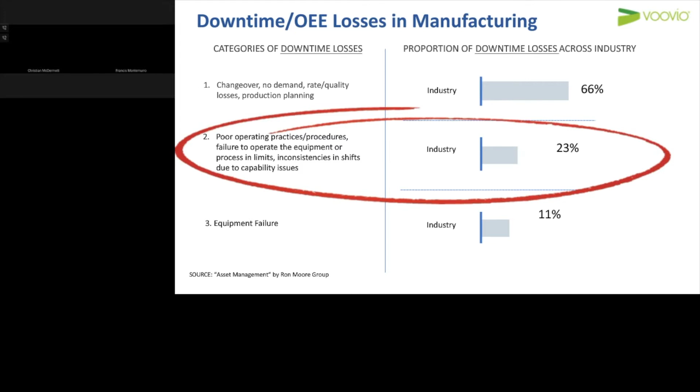Building on that a little more around operational discipline and building operator competency. If you think about what our operators are asked to do whenever they are new to a unit or a new hire within a manufacturing organization...

They are asked to train and qualify on hundreds of procedure pages just within a process unit. And what we've found in our projects is these procedures are written with generalizations and ambiguities that assume operator competency. Detailed on the page are some examples of those generalizations.

In addition to these ambiguities that exist in the procedures, the operator isn't afforded the opportunity to learn the entire procedure, mainly because the plant is in operation. So they're not afforded the opportunity to start up or shut down an entire process or complete an equipment swap.

So when they qualify after 2 to 3 months, they really only learn about 30 to 40% of the content that will be required for them to be fully productive and effective.

And because our seasoned operators are becoming scarce, as the baby boomers are retiring, and our non-essential personnel are being asked to work remotely or from home due to the pandemic...

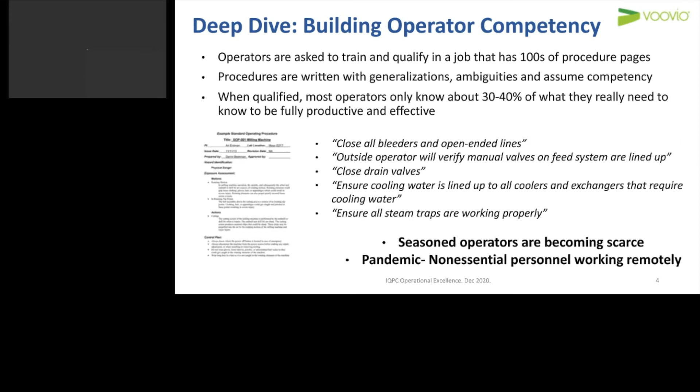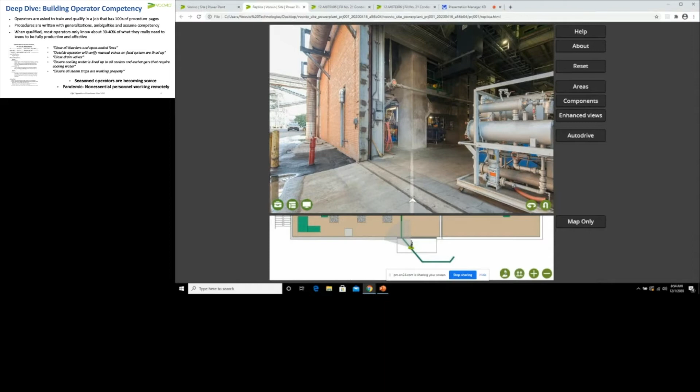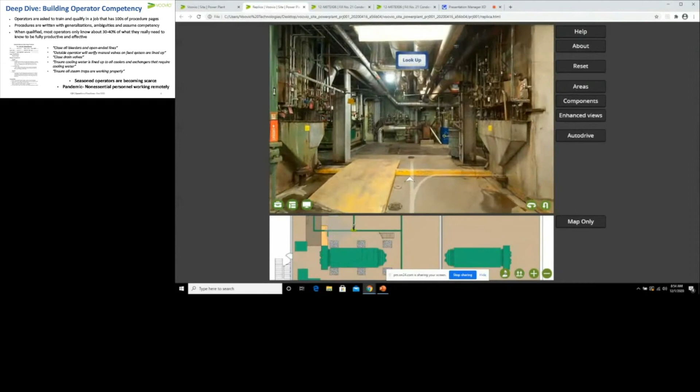So I am doing this from my laptop remotely. I'm not in the office, but I'm able to walk through a real plant. It's photorealistic, all the equipment, how it is in real life. And as you walk around you'll notice I can turn corners, look around, turn around. So you have the same degrees of freedom as you pretty much would in real life.

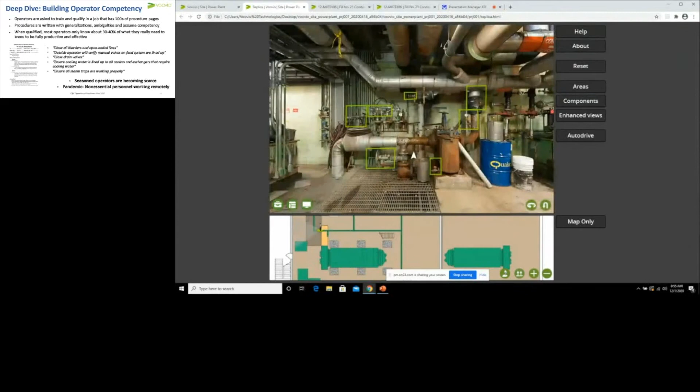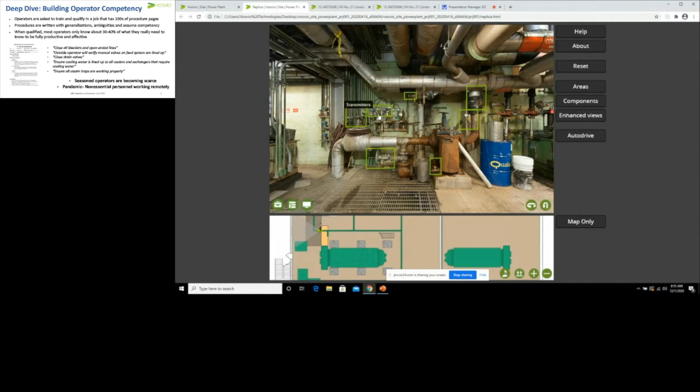You'll see as I turn around here, there are these green boxes, so you can also have equipment tagged and labeled. So operators anywhere, in the control room or even from home, can access and view their real equipment with the correct names.

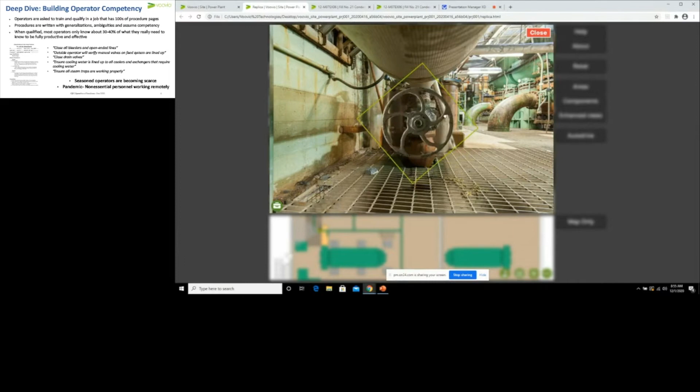And if you click on one of them, you get a detailed view of that piece of equipment. In this case it's a valve, and I can even grab the valve with my finger on my touch screen, or your mouse, and rotate it. So we can recreate the real functionality of equipment.

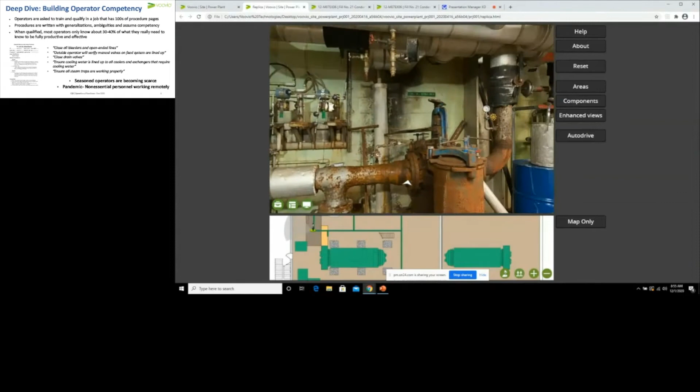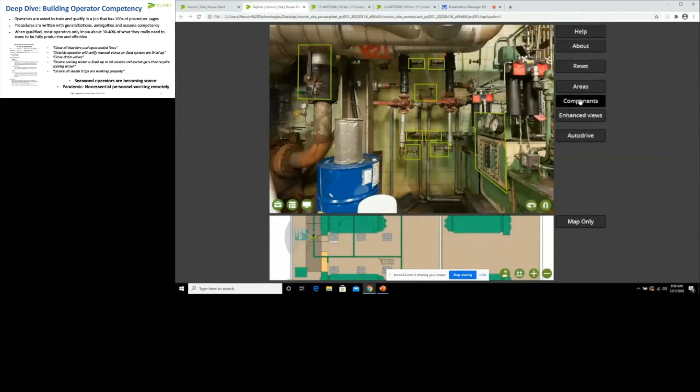The stuff you're seeing right now is, of course, small items and instruments, but we can tag vessels, pumps, compressors, things like that. And operators can find things without needing to rely on those experienced operators, simply by opening up a search box and typing in what they want to find.

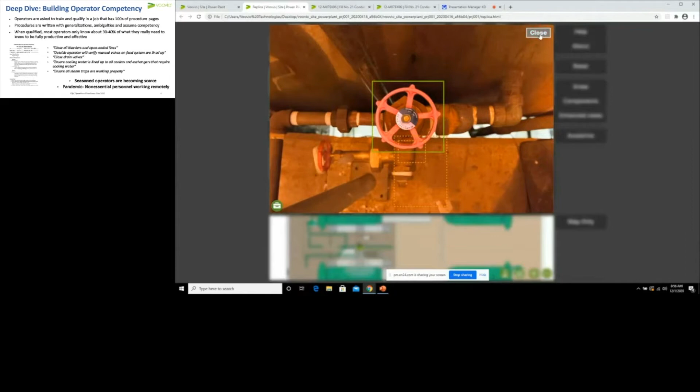For example, 993, it's a valve. You click on it, and it will take you straight to that location in the plant where that valve is. So you don't have to rely on people to find things.

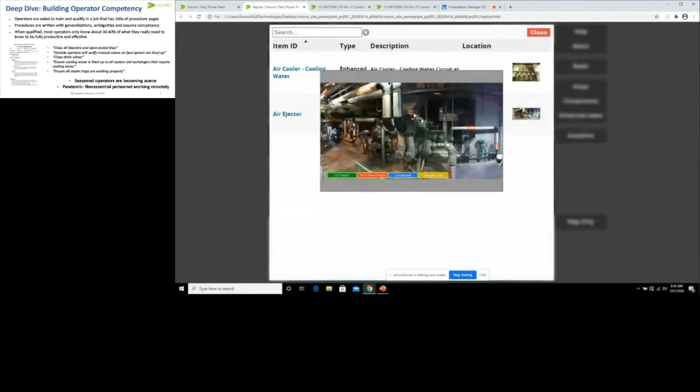Within digital replicas, you can also embed what we call enhanced views. This is where you have a piece of equipment like this air ejector and a bunch of labels at the bottom, and we can click on these icons and activate the flows. Here you can review or refresh your memory on how this piece of equipment works. It's a tool you can use for training remotely, or even just for refreshing before you go in the field, or even take it with you in the field on a device. And likewise, where you have complex manifolds...

We get requests from customers for these types of enhanced views all the time. Operators can interact with these valves and understand how this process works. So you'll see my mouse here on the right. I can click on it and open.

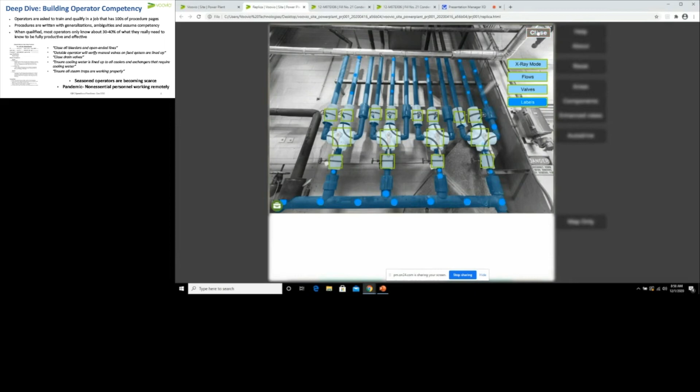In this example, you'll see I have my mouse waving around, and I can open and close these valves simply by clicking on them. This allows you to review and refresh things again when you're not in the field. All you need is a computer, a tablet, or something like that. There's no special hardware required for this type of digital replica.

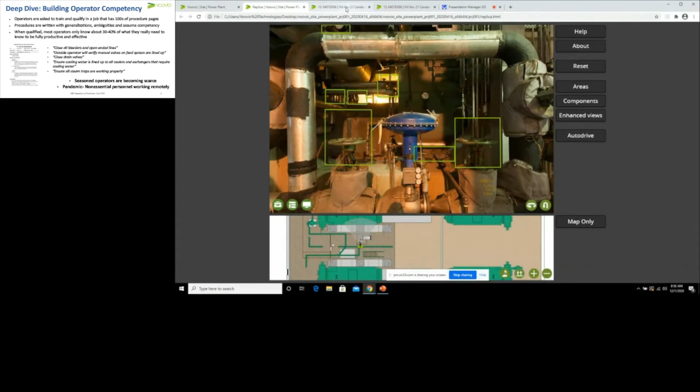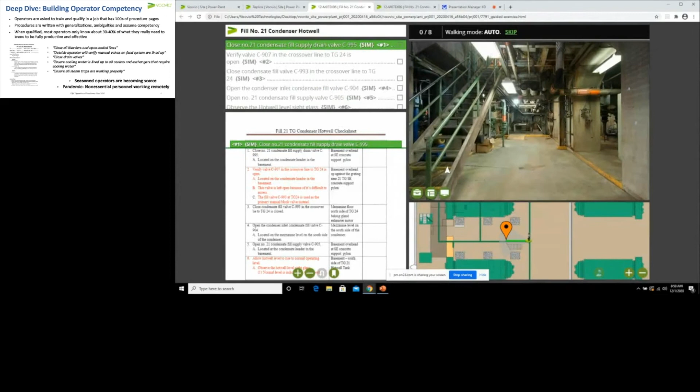So having that replica, your real plant on a screen, allows you to utilize it for all sorts of different needs, including building competency in procedures. What you're looking at right now is a version of the simulator here, the procedure simulator. It is a guided module. Think of this like a virtual SME, a virtual trainer almost.

On the screen, you will have the replica, so you're all familiar with this now. Below that, we have the map again, so you can always see where you are. On the left, this would be the customer procedure, the procedure that the operator would have in their hands, or print out, or use. Above that, this is where Fran alluded to before - this is an action-oriented checklist.

The reason why we have this in addition to the procedure is a procedure may have a generic step such as close all the drain valves, but maybe there's 11 drain valves. So up here, we would have 11 action items, because you have to walk to every drain valve individually and close them, so you don't forget one, or you do them in the right sequence and so forth.

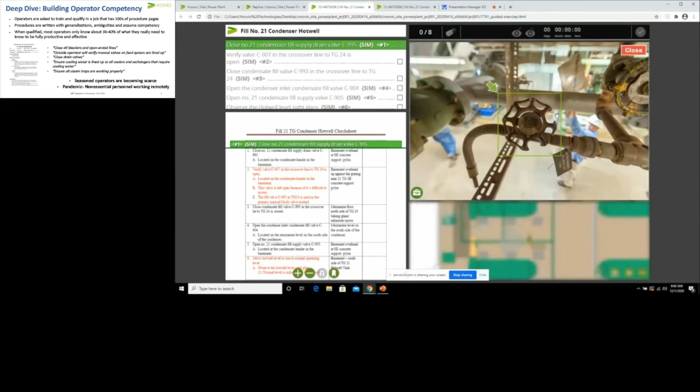So let's do the first couple of steps here. I'm going to click on this valve and I'm physically having to close it. Having this interactive replica allows you to actually interact with your equipment.

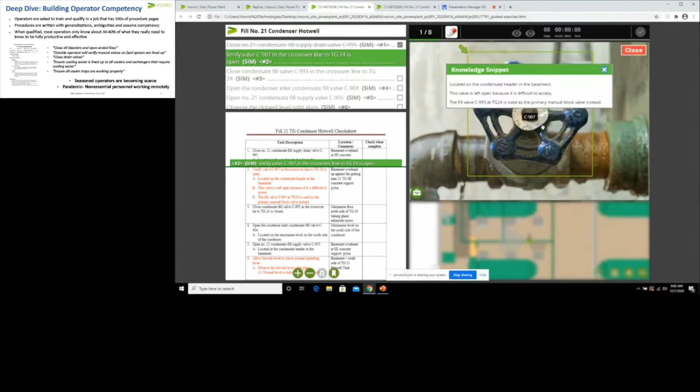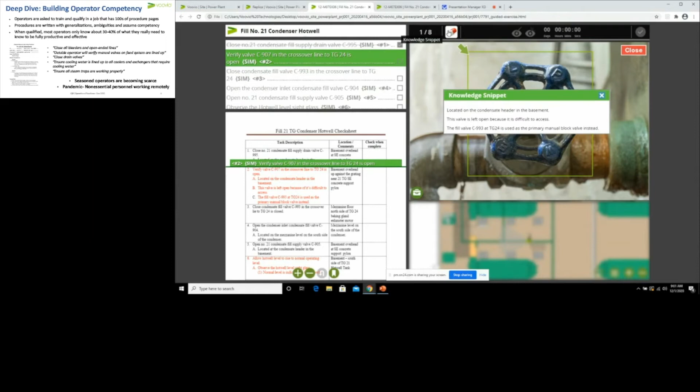Once I've completed that step, it takes me to the next step in the procedure, and you'll notice a little box pops up. This is where we can tackle those knowledge transfer challenges that we alluded to before. This is a knowledge snippet where you can insert text, like in this example, which is explaining why this valve is left open. But you could have video, a link to another document, or other information that is crucial for the operation of this valve or this step.

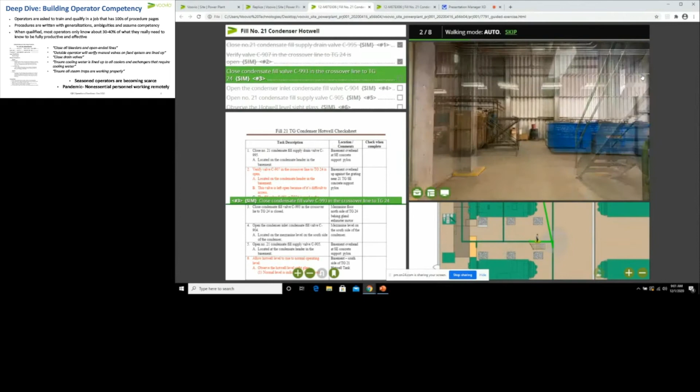It's captured in a way that an operator can easily absorb, whether they're experienced or not. So this virtual SME will literally guide you through your procedure, allowing you to practice and learn.

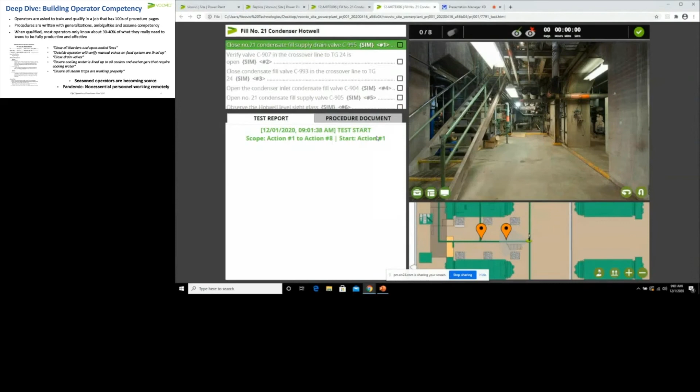But what about testing? Testing is a key part of building competency. So let me finish by showing you this. This is a test module where you are completely alone, unassisted in the replica. So I could walk completely the wrong way here, but let me do the first step correctly, and you will see you get immediate feedback on my performance.

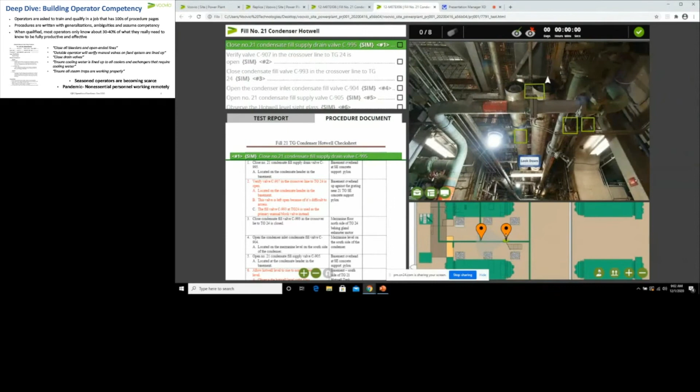I'm going to look up, and I'm going to close this valve. Again, you physically have to interact with your computer screen and click confirm, and you'll see on the left here, you get immediate feedback. The system is tracking everything I do. I got this action correct. But what if I make a mistake? Let me walk to where we were earlier and crack open this valve here.

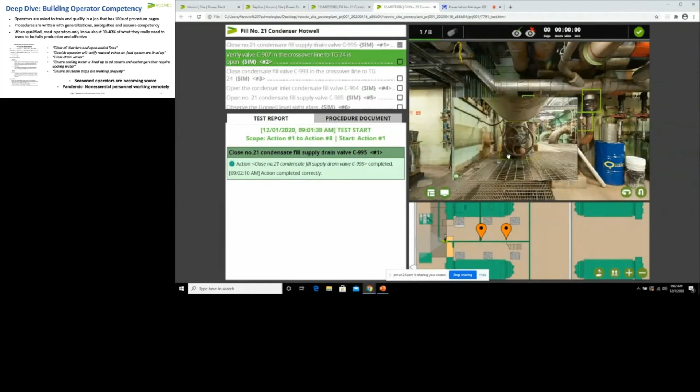And you'll see when I confirm I've completed it, I have that immediate feedback, and it even logs the valve which I touched, which was the wrong one.

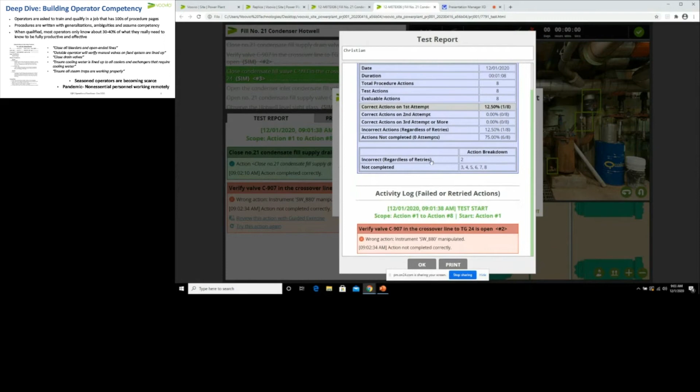So here the output of such a test is a report, and it's tied to your name, it's tracked and it's recorded. It means you can learn and test competency on a wide variety of procedures, whether they're long or short. You can do entire procedures or sections of procedures, but it allows you to really scale that competency building.

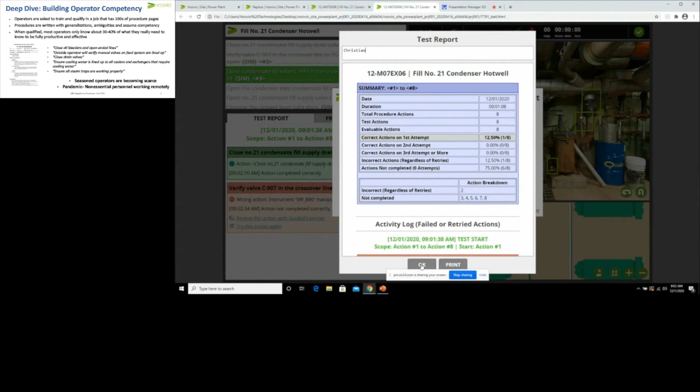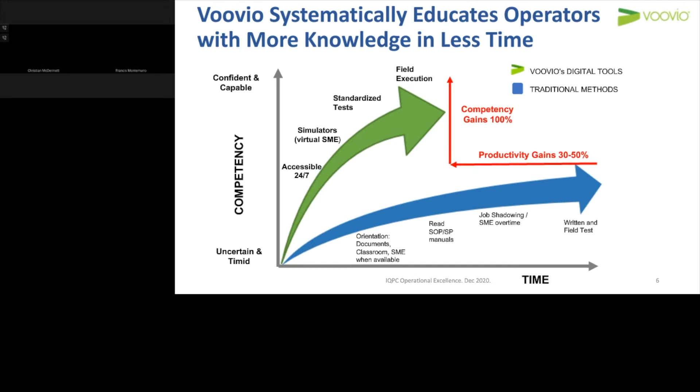So competency is definitely improved, and it is achievable—we can see the results through the test assessment.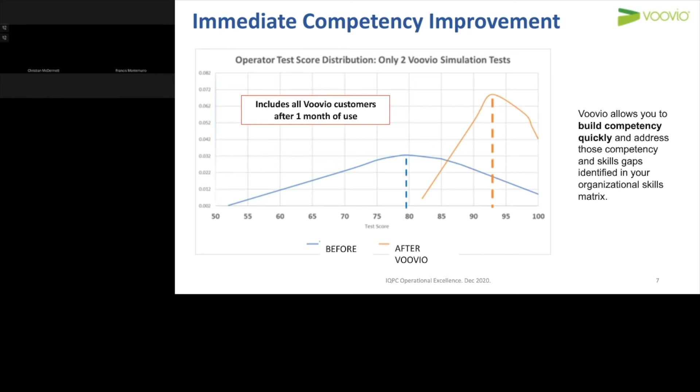I do want to highlight customer number 4. This customer has been able to free up their learning and development coordinators, their SMEs, from working overtime while qualifying the operator in the area. Over two years, they've been able to validate savings of $265,000 because they've been able to free up those trainers, and the operators have been able to train on their own time and become competent in procedures.

In addition, this same unit was having issues with delayed startups, unplanned shutdowns, and time to get to first quality.

They've been able to document and validate over $500,000 in a year due to the ability for the operator to practice procedures prior to executing them in the field. The field operator can practice using the guided refresh learn modules, practice taking the test before they go execute in the field. So it's real savings for our customers.

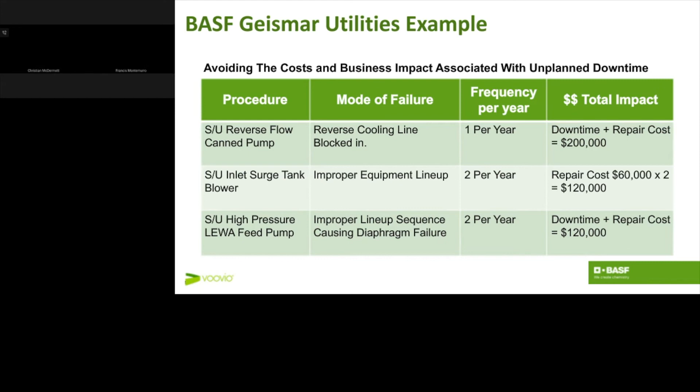With that, I'd like to move to the next polling question. Does your organization have any of the following manufacturing challenges that could be addressed with improved operator competency? You can choose one or you can choose several.

Okay, thank you. With that, we'll go to a summary chart that summarizes the benefits of simulation for the field operator. It definitely improves performance, as we've shown in our results, and it is easy to implement. Operators have the ability to practice their procedures in a real plant replica 24/7, 365 without depending on the availability of a subject matter expert.

It speeds, we have data to show the speed to competency is improved by 100%. In addition, it reduces the time required for the SMEs, the trainers, the learning and development specialists to spend with those operators, qualifying them in their job.

This reduction, we have results showing 50% reduction. This affords those SMEs and other resources time to spend on higher gain activities like continuous improvement projects, etc., and to reduce or eliminate unplanned events, environmental releases, safety incidents, etc. Again, we have demonstrated results where the proven reduction in equipment failure, loss of primary containment, flaring - the savings have all been validated by our customers.

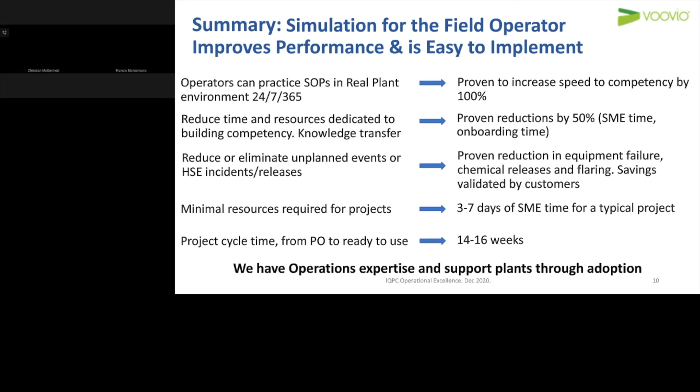With that, a brief show of the customers that are currently using Voovio. And then I'd like to open it up for any questions.